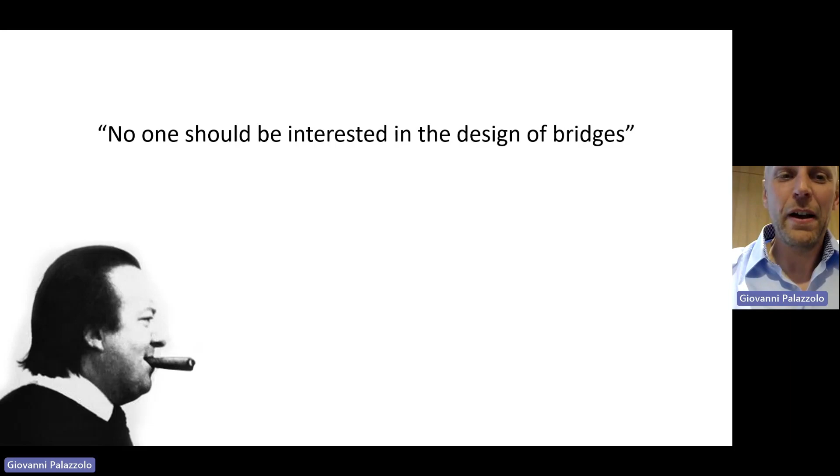It's a great quote and a valuable provocation for any designer. The quotation's from this gentleman in the bottom left-hand corner called Cedric Price. I'll come to him in a moment. In a way, it's just unfortunate that bridge design is used as the basis for this metaphor, because I find that bridge designers, whether from an engineering or an architectural background, I couldn't care less, to be problem solvers first and foremost.

In other words, we're all very concerned indeed how to get to the other side.

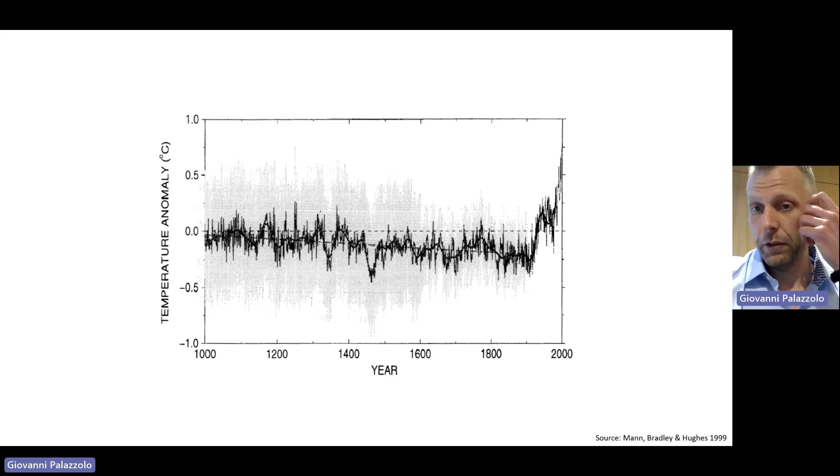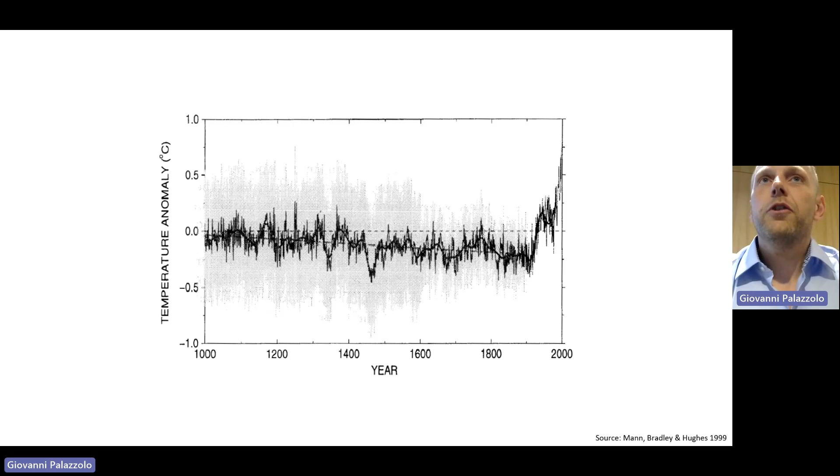Brief segue, this is the hockey stick. I was in my RIBA Part 1, my undergraduate, when this graph was produced, and it needs no introduction. Global temperature variation or anomaly on the vertical axis, plus or minus 1 degree for the last millennia. Now, of course, the implications of what this describes are so much more profound than a change in temperature. I'd say this is the defining image of our generation professionally, and the context within which all of us as designers are now operating.

Back to Cedric Price. He's been called the most important architect that you've never heard of. He was a teacher and a provocateur, raconteur, bon viveur, all of those things. He taught at the Architectural Association here in London, and through his largely unbuilt work, he was nevertheless a colossal influence on the course of late 20th century architecture, especially the work of the high-tech knights. Think of Foster, Rogers, and so on. Think of the Pompidou by Rogers in Paris.

Named for the client sponsor, Lord Snowdon, it was designed by Price with Frank Newby, an extraordinary designer himself, well known to this audience, I'm sure, and certainly to this institution.

The aviary employs principles of tensegrity, much like Newby's earlier Skylon at the Festival of Britain, but in this case, to provide a suspended framework of 4 tetrahedrons that then create this kind of enclosure wrapped in mesh.

I find the economy of this structure to be beautiful. There's a reductive approach to material here, and it's a direct response to a functional brief. In that sense, it is not dissimilar to bridge design, and I expect Price knew it.

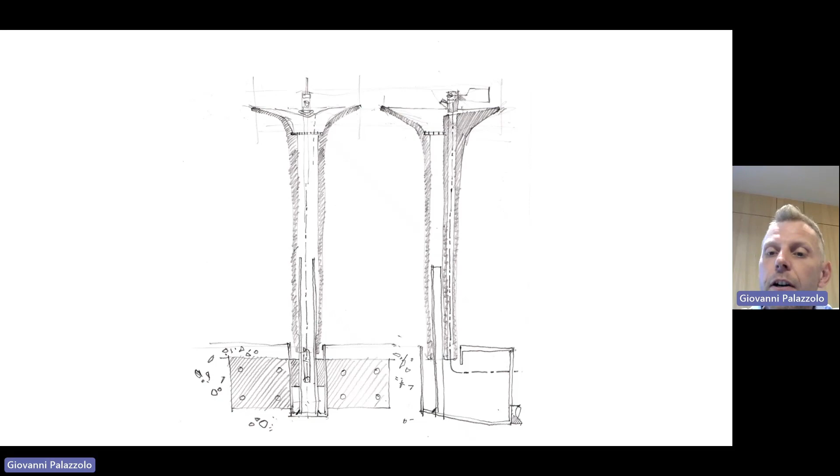They've since been installed in several of London's royal parks. It was won in an open international competition, and it's the first of two examples of industrial design that I'll share tonight, and it neatly encapsulates economy of purpose. It does the thing it's supposed to do, which is deliver clean, safe drinking water to all manner of users.

K9 at the far end there. There's a dog bowl at the base, which acts as an overflow, and it's also the trap. So if someone drops their wedding ring in the top, it will appear at the bottom for safe retrieval. It also functions as a bollard.

Now, these drawings are from the early competition iteration. The form and the connection at the base developed and was significantly refined, in fact, not least with Paul's input after we won the competition. And here you can see more of the refinement going on.

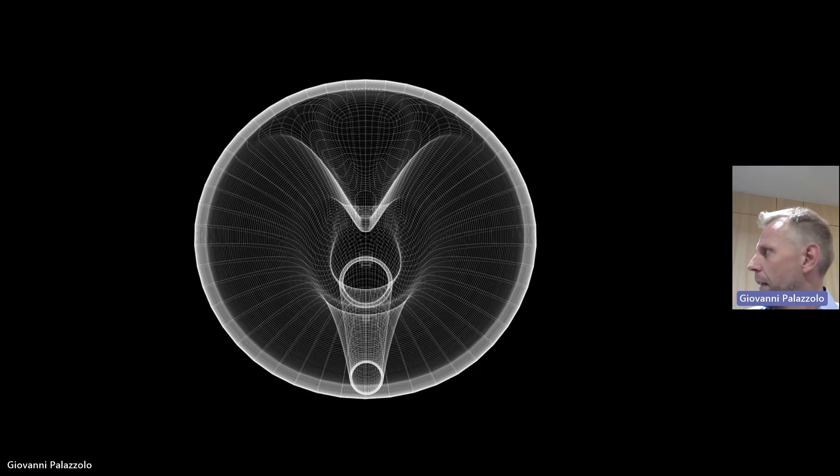As you can see, it's a singular form that provides the mounting for the faucet at the top of the screen, a bowl for splashes, the drain, a sleeved connection to the base assembly. The design is what I'd call tap agnostic. You can mount pretty much any outdoor tap on the market to the fountain.

Now, this is important to us and our approach to design. It's essentially open source, if you like. It's designed for long-term flexibility. And incidentally, that's another lesson that we've taken from the philosophy of Cedric Price.

Now, of course, we also have a fascination with material quality and aesthetics. We wouldn't be architects if we didn't. The drain cover is a kind of a kidney bean or a meniscus of stainless steel. And this is because visible cleanliness is important to any design where consumption is involved.

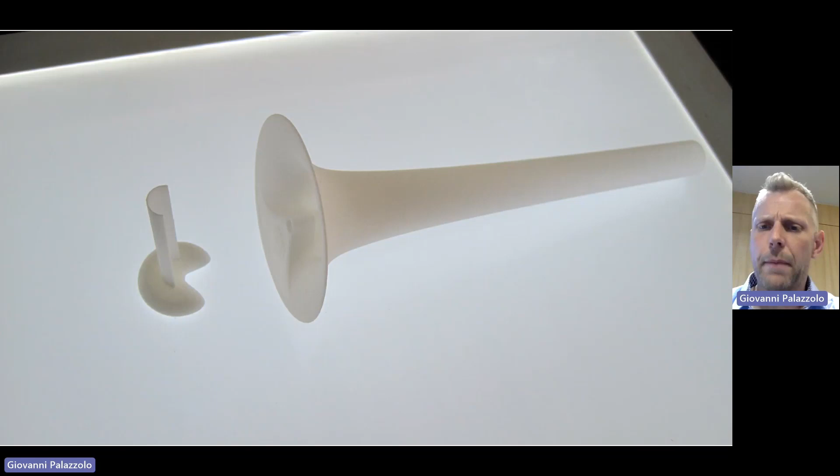This was also one of our first forays into rapid prototyping. It's now obviously commonplace in everything that we do. In this case, this little model was proof of concept that the various bits of this assembly fitted together. And here's the actual size, finalized geometry, which was milled on a 5-axis router, which was very unusual at the time. It's now, like I say, commonplace.

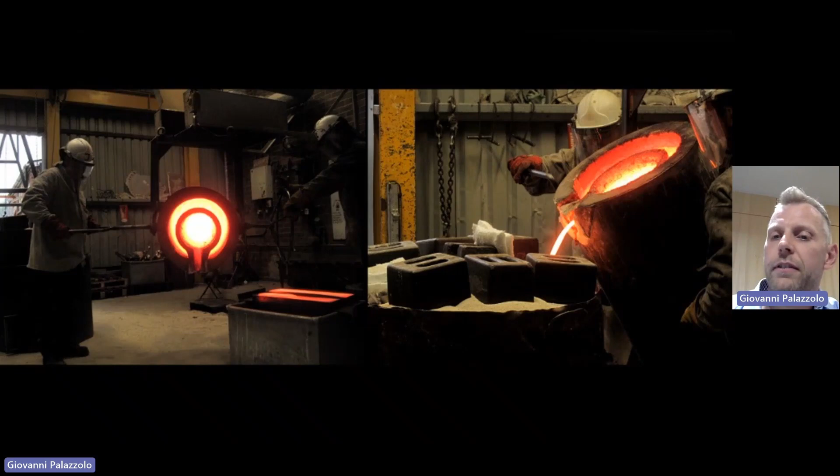Now, that formed the master part for the creation of wax-lost sand moulds at Castle Fine Arts Foundry in North Wales, which resulted in just the most gorgeous work when it came out of the casting. Obviously, it was then all polished up for installation in the parks.

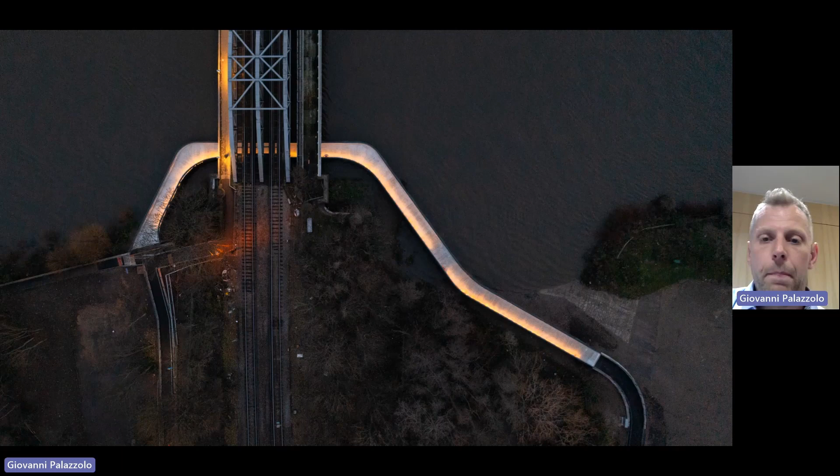It's the plan form. Now, economy of purpose is also achieved through the subtle flexing of the geometry at the corners of the structure. It's a really lovely worm's eye axonometric, or fish eye, if you like.

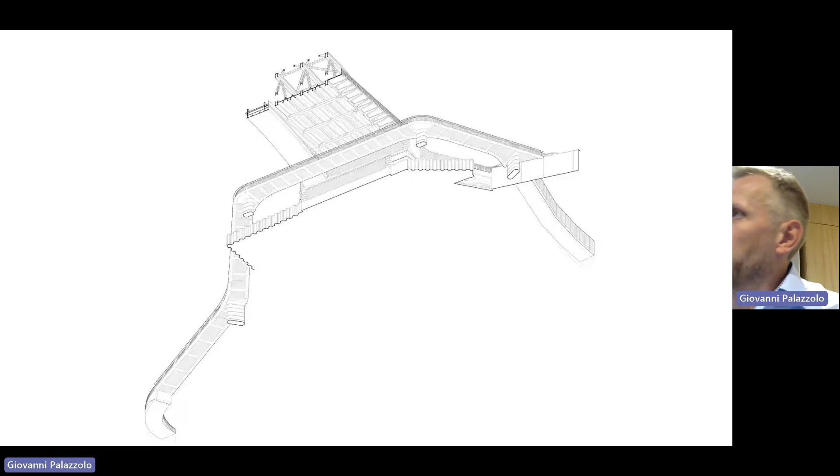Just where we go beneath the existing bridge, you can see how it's very subtle. The geometry of the deck widens at those points, a local increase in width. This is simply to enable the congregation of people at those two points, looking up and down the river, giving a wonderful new view of the city, but also more particularly a great spectator viewpoint for the Oxford and Cambridge boat race each year. That's not the race, these are just recreational rowers, as you can see.

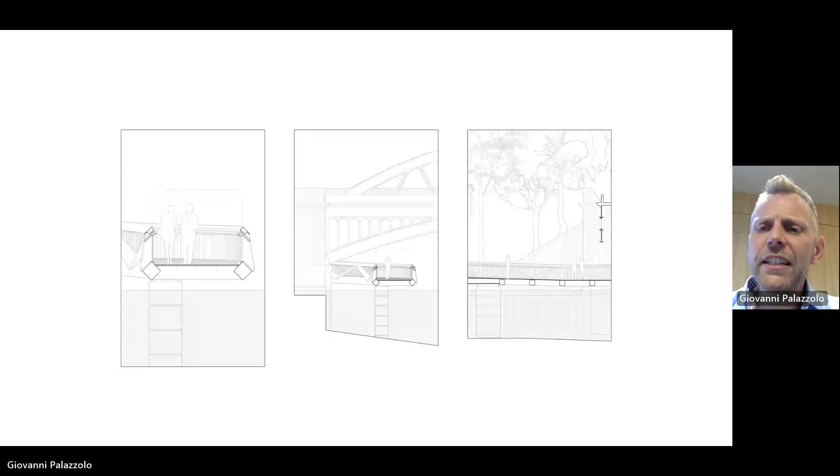Now, I mentioned the coincidence of structure and parapet. This is something we've explored on several recent bridges, and you'll see some of them this evening. But here it means the individual spans are discrete. They're connected at the piers, of course, but they're fabricated and installed simply as independent components, each one brought up the Thames from Tilbury docks before being floated across the piers and lowered on the receding tide. In other words, let nature do the work.

Now, of course, it's not quite as simple as that. The installation relied on gravity, but also the Chris Murphy 3-part locator pin. I don't think Chris is in the audience this evening, which is a shame, but his pin is somewhere in this photograph. Bridge design is full of these innovations, and they always come from economy - they're always about achieving efficiency, making more with less. In this case, free lifting and lowering capacity of the tide has been enabled by Chris's ingenious design that ensured absolutely pinpoint accuracy as this thing was dropped onto its piers as the water went out. Not a lot of people know that, and certainly none of the users each day, but it would have been quite a different bridge without it.

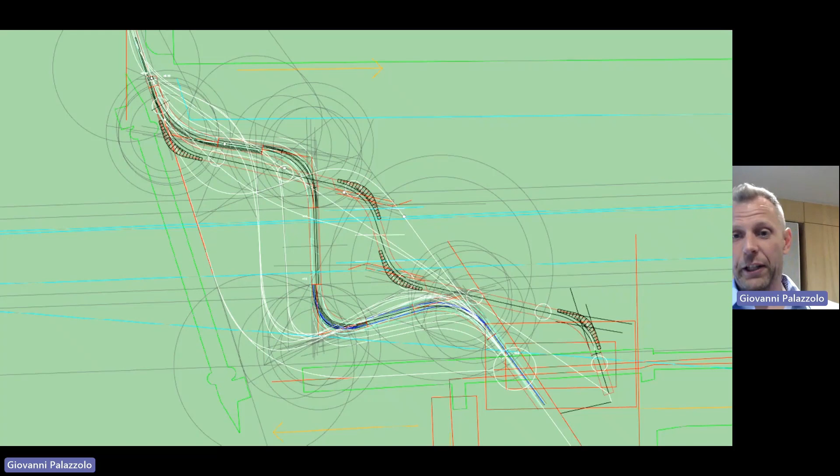Now, our next bridge does legitimately go from one side of something to another. In this case, Royal Victoria Dock in East London. As an aside, another joy in what we do comes through the way we use drawings to explore geometry - how geometry can solve a problem. This is very particular to bridges, much more so than buildings or industrial design. I think bridges are almost unique in this special aspect. This is a drawing where we're looking at the plan alignment of this particular structure alongside Simon Fryer and his team at Buro Happold. It's about probing the geometry in pursuit of solving the problem.

So a bit more on that now. You can see the ExCeL Centre at the top, Royal Victoria Dock in the middle, and the new Silvertown redevelopment by Lend-Lease at the bottom of the image. You'll also recognise the existing bridge at high level, just left of centre there, the delicious Davidson Royal Victoria Dock Bridge. Now the black line connects our A to B, but at a lower level than the existing, because this new bridge must cater for a vastly increased footfall once Silvertown is developed and in use.

The dotted line in the middle represents an opening section of the bridge where we must provide unlimited vertical clearance for tall ships and so on. The constraint on the left-hand side of the dock is provided by the existing bridge, not ours.

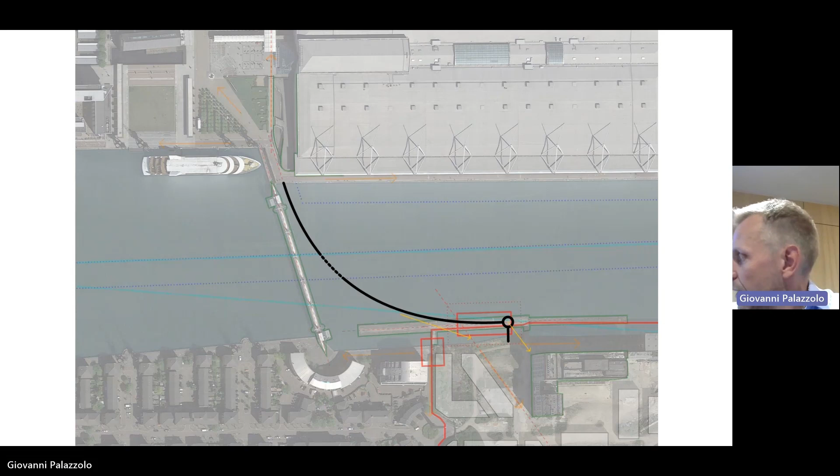Now, a straight line is obviously the shortest line, but in this case, we might make use of an existing structure, this kind of pontoon thing at the bottom, to shorten our bridge. We could flex the alignment to orient people directly into the heart of the development at the bottom. But notice that the dotted part of this diagram, which is the opening section, is starting to get very long. Very long and moving equals expensive and more energy intensive. So more normal to the channel shortens the opening parts, but here it lengthens the overall structure.

Likewise, again shorter opening span, but overall still much longer. Maybe we can make use of the dock again, although it's a longer route overall and less intuitive for users. Now we're starting to get somewhere - shortest opening span, and it delivers users where they want to get to. And there's the sweet spot: comparatively short opening span, comparatively direct route, plenty of modularity and replication in the curves and spans.

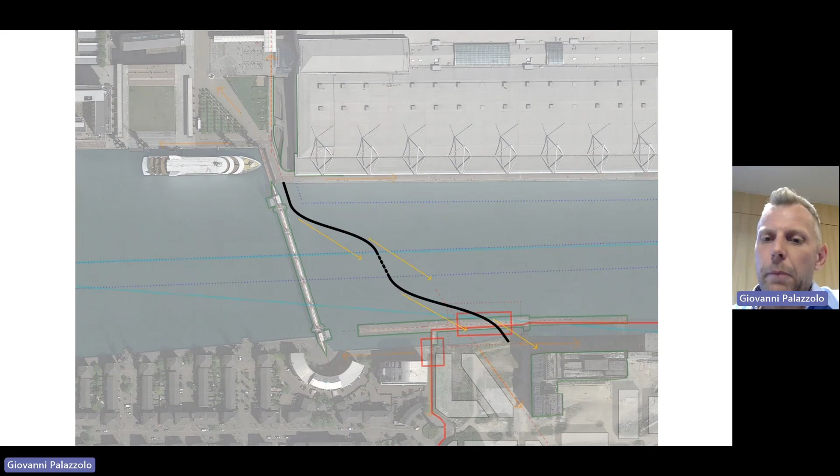And here it is. Newham Council granted planning permission on Tuesday night this week for this structure - a unanimous decision by committee, and we're straight into detailed design. Apparently the bridge needs to be open in 2025.

The opening span was designed with Eadon Consulting, of course. Who else?

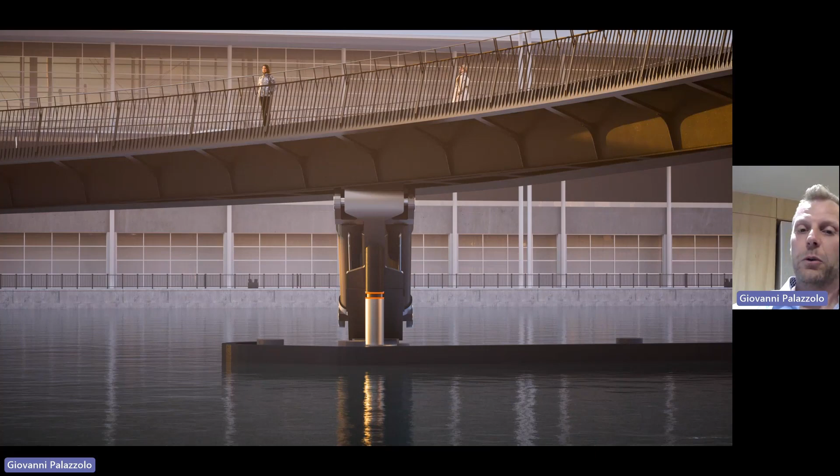The top surface is uninterrupted when closed. It's a stealth opening bridge in that sense. It's about a consistent urban experience for users, with the element of surprise and delight when boats do indeed need to pass through the dock. There's joy in the detail, embracing the difference between the static spans and the moving span. The actuators for the bascule are integrated into this pier design. The bridge is part machine, and the design does not try to hide this at all.

So there's another view. We can see the S-curving trajectory of the deck across the dock, backspan with this V pier in the foreground. Now there is a vertical curve in addition to the opening span, such that smaller crafts can just pass beneath. This means that the deck edge and the soffit is therefore visible from the quayside. So the consistency of the structure, including that opening span, is very important to us.

It's relatively efficient, and you have this appealing snake-like form beneath what is an otherwise urbane and civilized public route. The top surface is a continuation of the public realm being designed for Silvertown as a whole. So economy of purpose comes from reconciling the competing demands of the opening span and the overall alignment of the bridge, but also the urbane topside with a structurally responsible but still expressive undercarriage beneath it all.

And just briefly on another opening bridge, this is another structure with COWI, this time at Port of Dublin, which is in the midst of a post-Brexit boom, with huge expansion underway as a result of the increase in direct transfer of goods from the EU to Ireland. Unfortunate, but positive for us in the sense that this new bridge will service that boom, permitting lorry traffic to cross the Liffey near the harbour mouth, whilst maintaining access for river traffic.

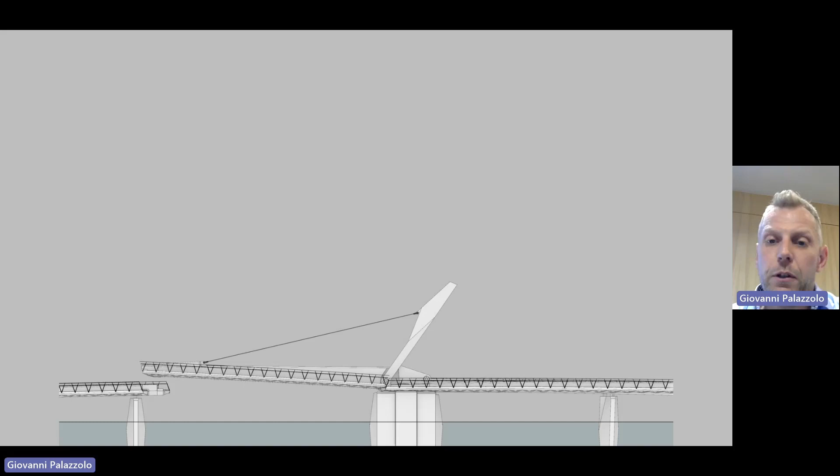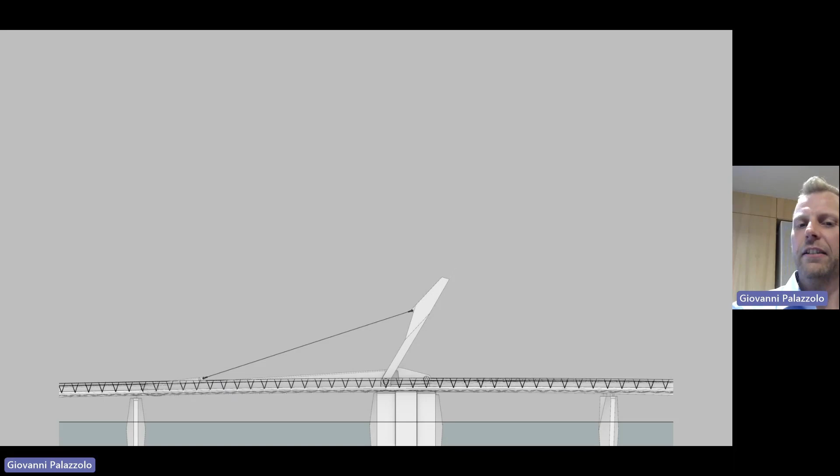This gives the game away. It's another piece of ingenious design, this time by Richard the Bridge. Speak of nominative determinism - who's in the audience, or is he? There he is. And also, of course, Eadon Consulting. By bringing the pivot of the counterweight forward of the deck pivot, the counterweight is brought into maximal effect earlier in the opening process, increasing its effectiveness and therefore the efficiency of the mechanism. The mechanism also occupies a smaller footprint as a result.

You can see the joy that comes from designing such a thing, making sure that the geometry all nests together and it all moves and looks sweet.

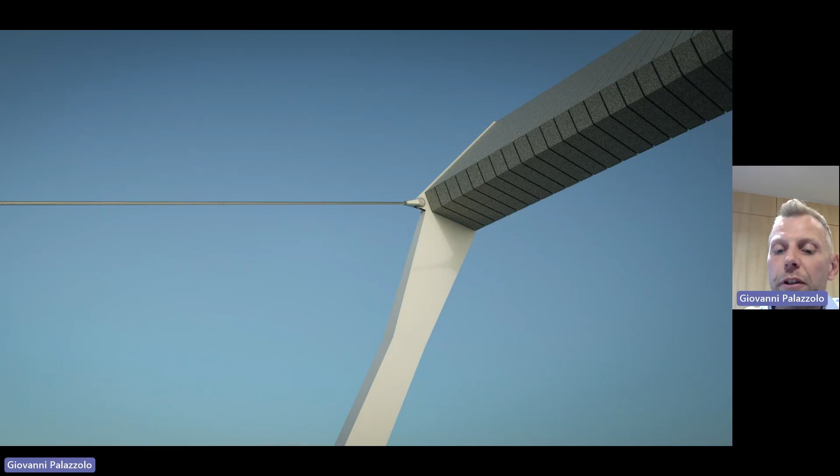Now, in the closed position, the counterweight - I feel like it's a demonstration of mass and the potential for movement, or potential energy, by holding this thing up in the air, a sort of portal over the roadway. We're currently exploring the use of Wicklow granite slabs as the counterweight material. This does bring some complications, but there is a clear reward there if it can be made to work. For one thing, it would hugely reduce the embodied carbon compared to concrete or metal.

Next category is economy of action. And like I said at the start, I have a hunch that this might be where there is the greatest potential for us as designers, and probably architects, to have the greatest impact in elevating the functional to the noteworthy or even extraordinary. First example here is actually a very ordinary structure, the Hams Way foot and cycle bridge near Worcester.

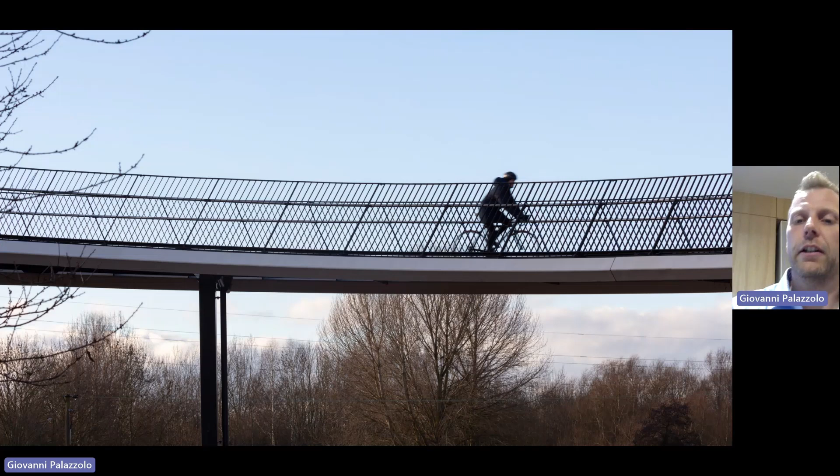So first, the parapets lean towards the direction of cycle traffic. This is part of National Cycle Route 46 from Worcester to the Malvern Hills. And this subtle shift, a very simple shift, alters your perception of the structure when you come onto it. It introduces some craft and a kind of graphic intrigue when you look along it, and also particularly when you look across it, as you can see in this image.

The approach spans couldn't be more simple. You can see on the left-hand side there, while on the right, the main span is an arched truss. To unify them, the outer edge beam and the members of the truss are all rotated approximately 45 degrees. This simple move captures the light, reducing the apparent weight of the structure, and again brings that craft sensibility that takes us away from its rather dull and quotidian peers.

And this detail, I absolutely love this detail. Where the approaches meet the main span, the two chords bend away from one another, separating the vertical support of the approaches and expressing the main span as a closed and separate element. So it's a modest and simple bridge, but I'd argue that these moves make it something a little bit special nevertheless.

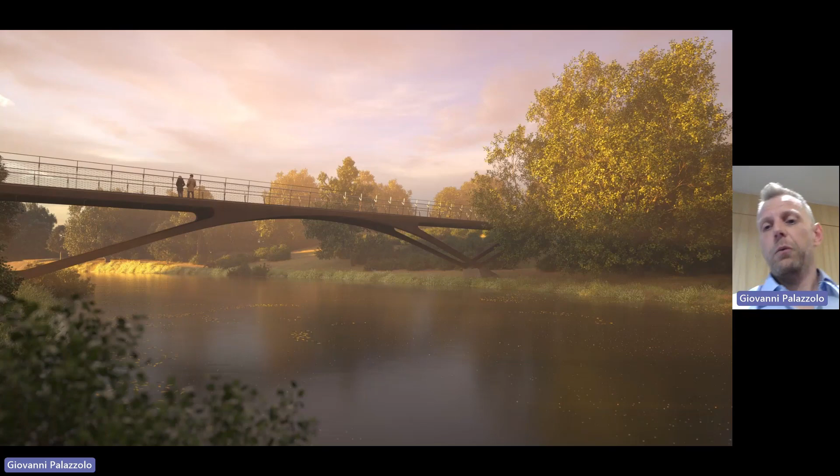And happily, the same team with Ben Curry and colleagues at COWI are now working on another bridge in Worcestershire, this time across the River Avon. And we have some hope that we might be able to talk to David about the fabrication of this structure in the future as well.

The entirely opposite end of the spectrum in terms of scale, I'd like to talk about 3 of our viaducts for HS2. We're part of the Eiffage Kier Ferrovial BAM team. We are sub-consultants to Arcadis Setec COWI. We are a very, very small cog in this gigantic machine.

But it's to great credit of our client, or clients, Arcadis Setec COWI, but also Eiffage Kier Ferrovial and BAM, that the role of a small practice such as ourselves is given a voice and can contribute to the discussion of what needs to be landscape appropriate design.

Now, I often think, Ian, of your formulation in your TED talk, that a badly designed and executed bridge is nothing short of an act of vandalism on the landscape. And I think that's brilliantly put, and I've had those words ringing in my head whenever I've thought about these structures.

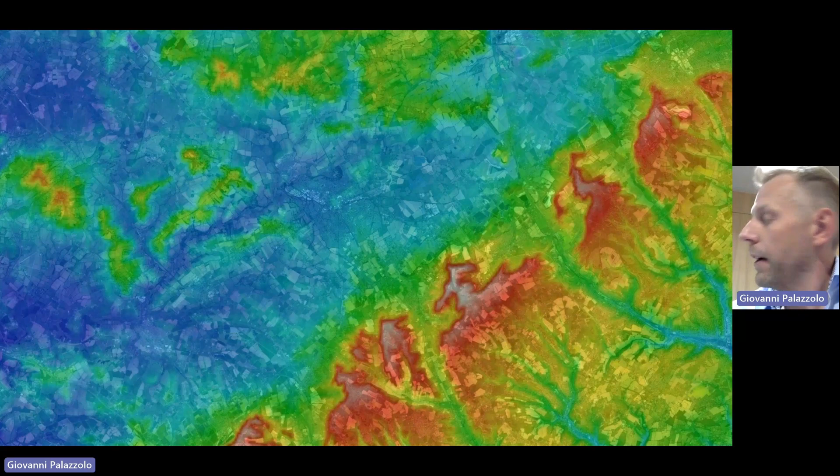Particularly the first 2 that I'm going to show you, which are located in the Chilterns area of outstanding natural beauty. This is a kind of elevation map of the Chiltern Escarpment, which you can see very clearly diagonally here on the right-hand side, with the great flat expanse of the Aylesbury Plain on the left. Importantly, you can see the valleys that cut through the Chiltern Escarpment. One of these is the Missenden Valley, which cuts through the escarpment at Wendover, just the centre bottom of the screen. This geographic feature is known appropriately as the Wendover Gap.

You can see a road, a railway running through this gap. It's been the main line of communication north-south through this part of the Chilterns for thousands of years. You've got road, railway, national grid, high voltage lines, public rights of way, everything follows this line through this landscape. So it's no accident that HS2 is also following this line.

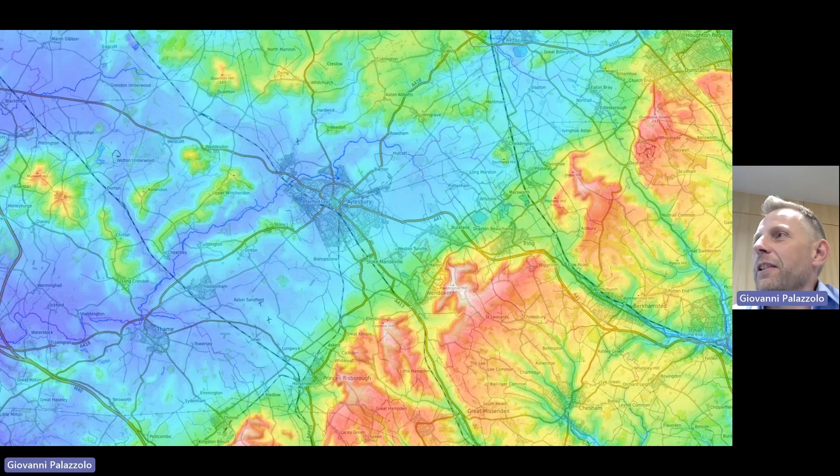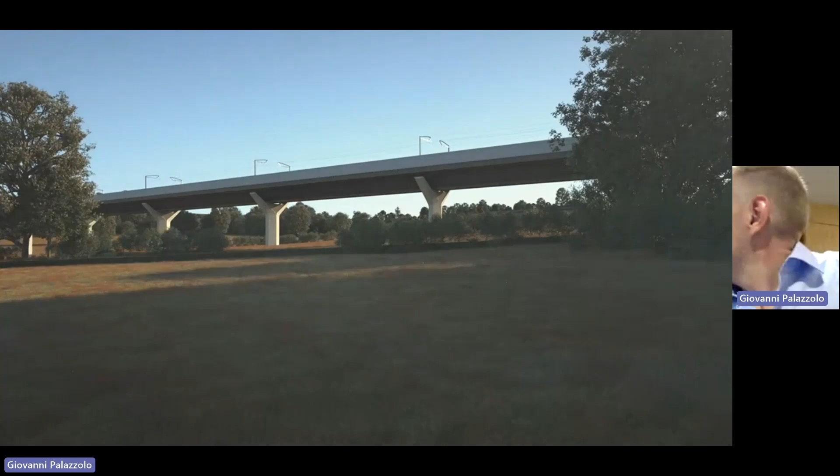That's certainly unusual. Again, in all of the views, apart from when you get very close to the structure, you can see that the viaduct is backgrounded by the landscape. Now, during the petitioning stage, the Campaign for the Protection of Rural England stated that, separate to the acknowledged icon of Colne Valley, the detailed design of Wendover would be a litmus test for the quality of design of HS2 Phase 1 in general. So no pressure.

So bearing that in mind, and of course Ian's TED talk, the first thing to do is pull the overall form of this viaduct into shape, respond to the landscape. This is the reference design. Now it works, and it had its uses in terms of the progress of the bill through Parliament, but what a lopsided appearance.

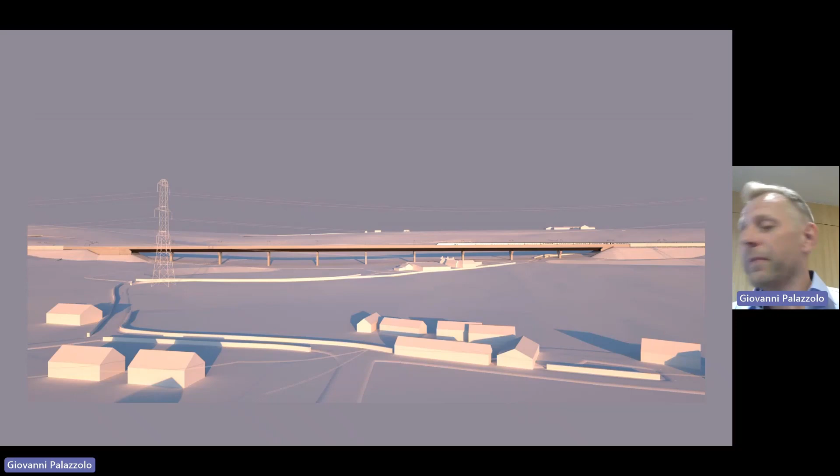Bring some symmetry, ensure that the space below the deck is balanced, and the air draft beneath the structure is greater than the beam depth. Simple things.

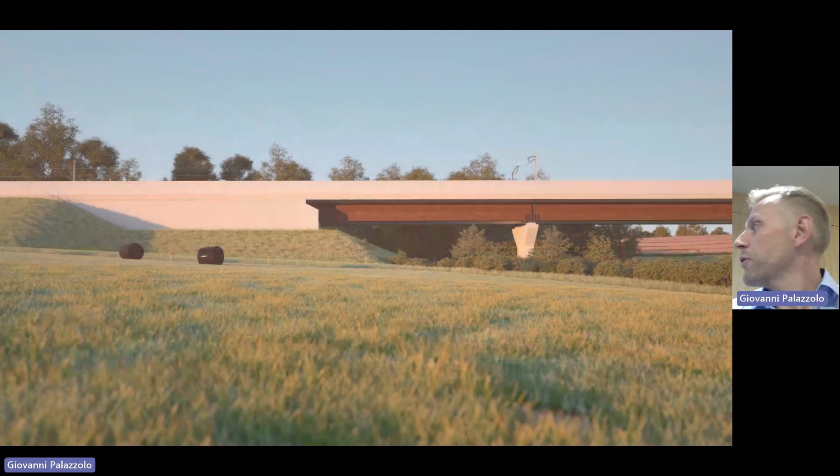Shortening the structure at one end reduces the cost, obviously. And even better, if we can replace that wall with embankment, we can reduce the embodied carbon even further.

We also look to eliminate all of the clutter at the abutments. So we bury the ends of the structure into the earthwork, so the viaduct springs from sockets in the landscape rather than frontal walls imposed upon it. The access stairways are then all corralled into one place with a single central access up the apron. And then within the bearing chamber, that's where we also have our access up onto the trace and for evacuation from the viaduct.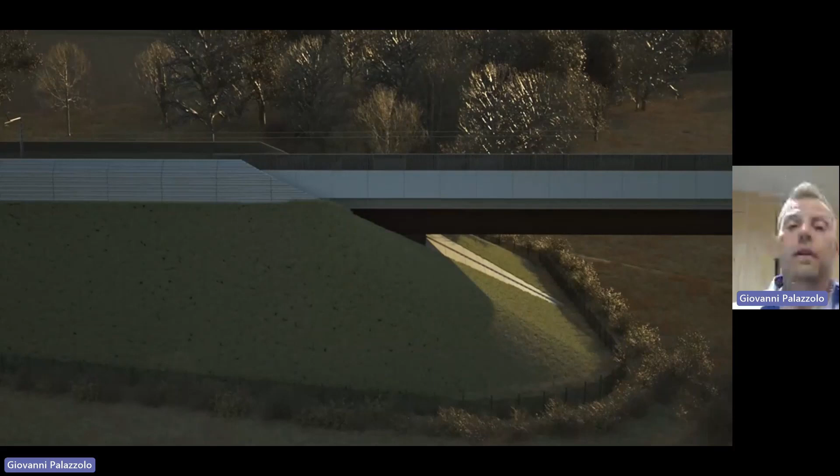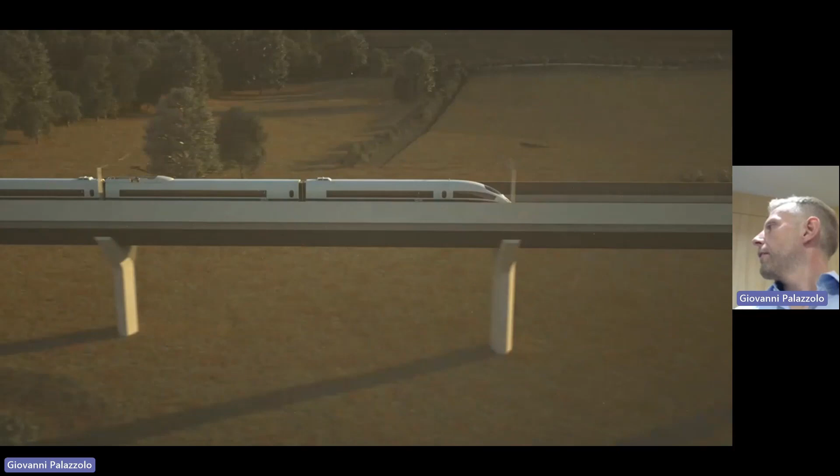You can see here that the noise barriers and the parapet all sleeve into one another. It gives you this balanced silhouette, which suits the near symmetrical ground profile from north to south. There's those piers again. The field pattern is reinstated beneath the structure, so it flows uninterrupted. And then we integrate balancing ponds and all the kind of other paraphernalia around the structure. And then again, at the south abutment, we have that same kind of socket detail. So it's kept as simple as possible.

So about those piers - see Gerard's in the audience. These two slides, I don't know if you recall a discussion on this. Here's an early iteration of the design, and you can see that at this point we're actually quite proud of our piers. You can't really see it in this image, but the hammerheads flow very nicely down into the narrow stem. We have the weathering steel, which again, this image doesn't show, but that sits very nicely against the rural landscape. Typically, you're seeing this against fields and trees and what have you. It all starts to blend, it all starts to work.

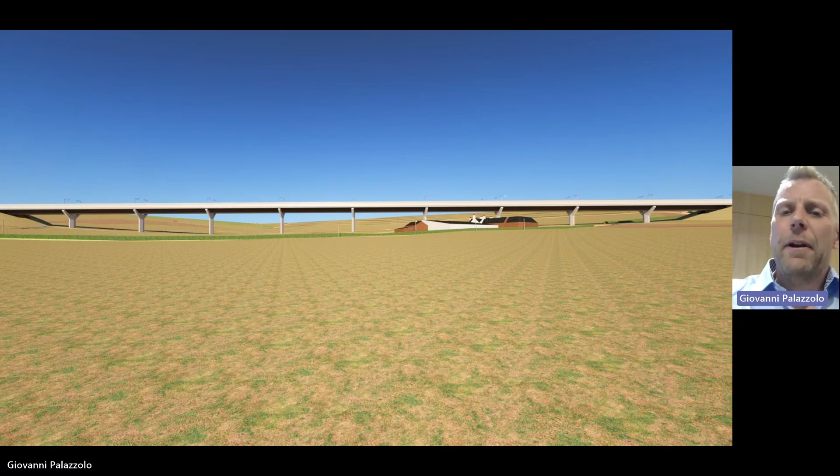But then we did this. Bearing in mind that this viaduct will overwhelmingly be seen in elevation, by projecting the pier heads upwards past the bearings, we achieve several things. We imply a connection visually between the pier and the parapet, which further recesses the beam, accentuating the lighter and more slender aspects of the design. It also masks the bearings.

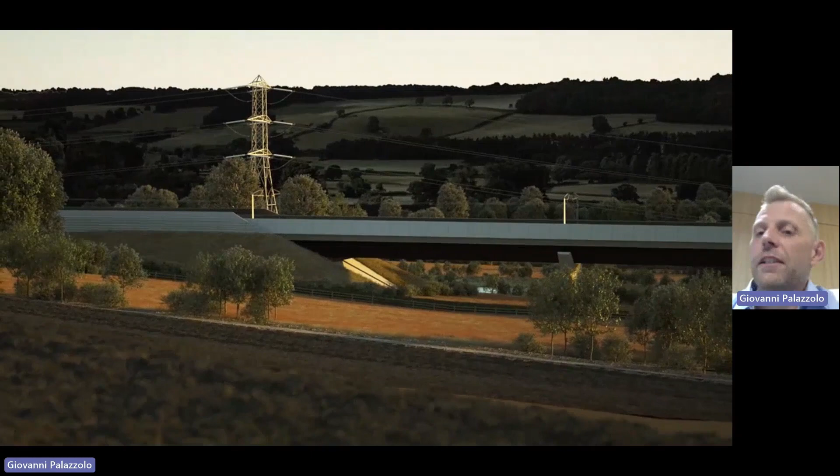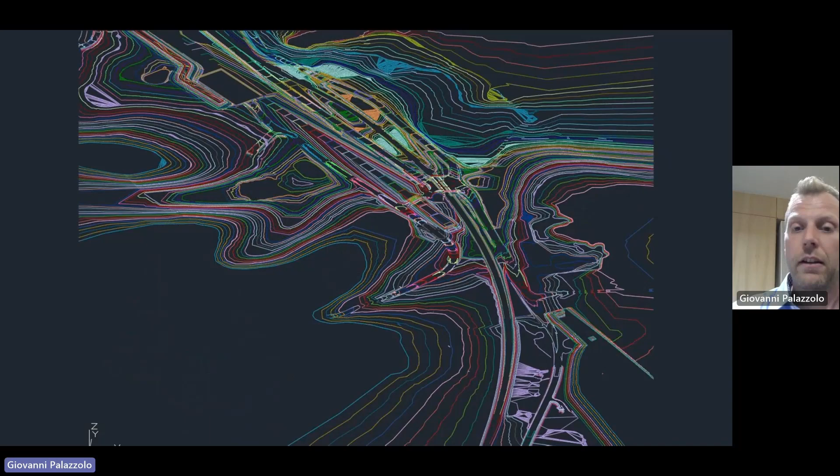Only 1.5 miles north of Wendover Dean, our next viaduct is located right in the middle of the Wendover Gap. It's the confluence of all those lines of communication - the A413, Network Rail, B roads, everything all crammed into this little knot in the landscape. And now we add HS2 to this congested space. It's certainly an economic use of real estate. Now, in contrast to Wendover Dean, Small Dean Viaduct is one that the public will experience at very close quarters.

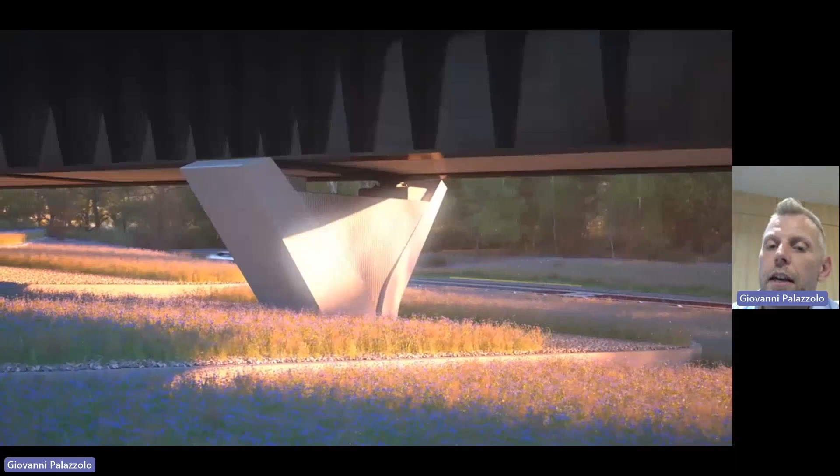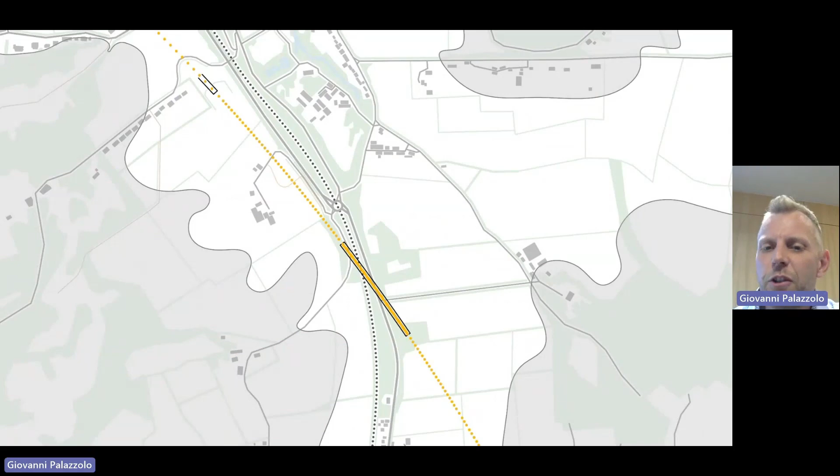You've got the A413, this main road, and public rights of way that pass directly beneath it. So detailing becomes even more important, but also the oblique view of the structure. So where the elevation was key at Wendover, leading to the symmetry and the sockets and the piers, here at Small Dean, the skew is everything. The views along the structure are absolutely key. You can see what I mean by that skew, and also just how the structure sits across this dip in the landform. It's essentially masked from the middle distance, and almost completely hidden from the long distance.

But close up, you see it all. And although it's the same structural form as Wendover Dean, it's a double composite structure, which Paul Van Hagen will be able to talk more about.

We're dealing with substantially longer spans than at Wendover and a different set of construction priorities on the part of EKFB. Now, these outriggers were originally suggested by Eiffage Métal as a way of accelerating construction by allowing for the inclusion of

permanent formwork for casting the deck on top. But of course, we seized upon them as a tremendous opportunity to do something with those oblique views. They immediately alter the appearance of the viaduct as you come along the road. And the design and coordination expresses the varying stiffening requirements.

Again, this is something that Paul will be able to talk to. These stiffeners bunch above the piers, they spread out to mid-span, they kind of concertina back again. And you will see that as you drive along the road, you'll see this kind of animation to the structure. I think this sort of infrastructural drama, if you like, will be extraordinary. I'm very much looking forward to seeing that structure on site in the coming years.

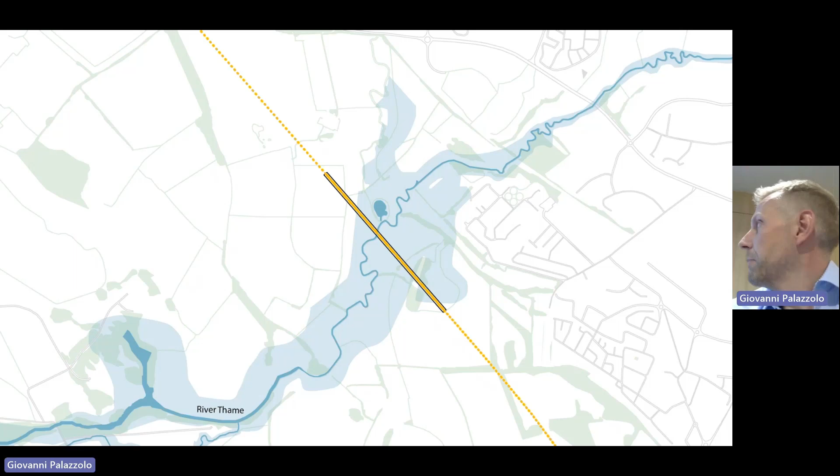Third viaduct is the next one to the north of the Chilterns AONB. It's not in the AONB, but it's nearby. This crosses the floodplain of the River Thame just to the west of Aylesbury. It's our longest and lowest viaduct on the route. Very different landform, flat as a pancake. Structure could be described as an elevated causeway.

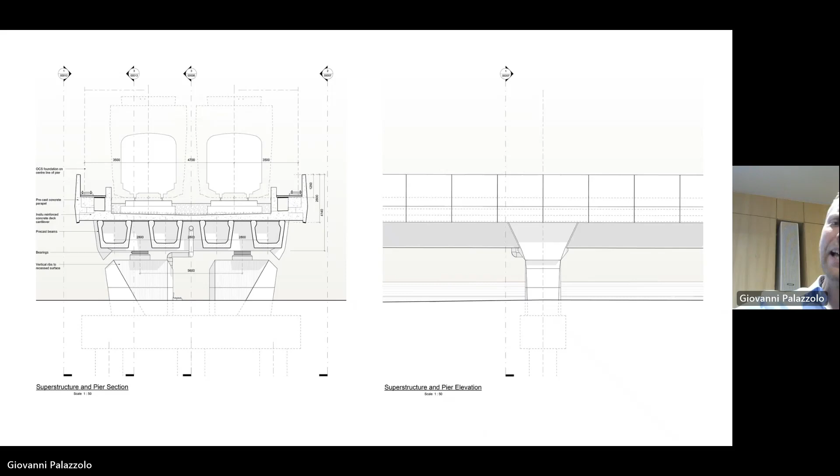It's that low. Now, there have been more iterations of this structure than any other we've been involved with on the project, and they principally concern the disposition of the beams. So it's not our bag at all. In each iteration, however, our focus has been on the detail, the deck connection, between the pier and the deck. So in a way, this is an extreme type of economy of action. We've been focusing all our energy on this one detail.

Now, the final scheme has been heavily influenced by EKFB's construction team more than anyone, and their subcontractor Pacadar. And Fernando's in the audience, so he'll be very much aware of all the detail of that. We've done something similar to Wendover Dean in that we've projected part of the pier head up. So it's again a very simple move, economy of action, like I say.

But this punctuates or interrupts the face of that beam to ensure that the viaduct is seen as a sequence of spans rather than just a relentless single extrusion. And again, in an anthropomorphic way, the detail clasps the deck. Now, this is a minimalist approach, but I think it's in details like this that a pretty straightforward viaduct can succeed or fail. And like I say, this represents the economy of action.

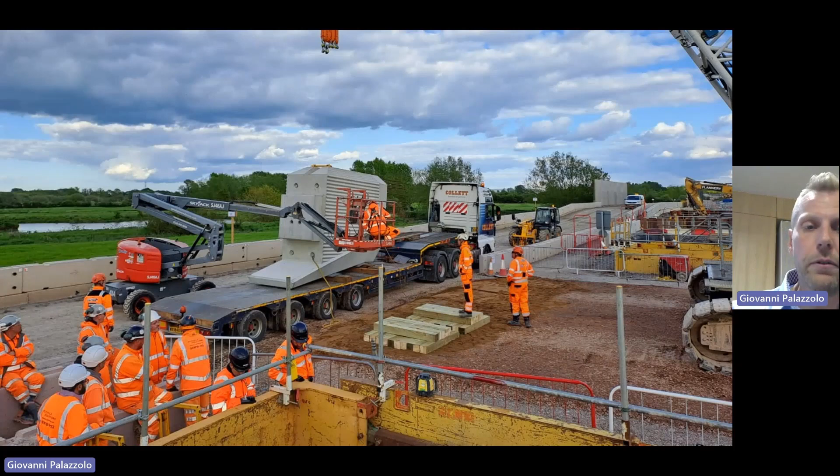What's remarkable about this structure actually is that it's one of the most recent consents that we have got. We only got consent for it halfway through last year, and yet it's the most progressed structure on the ground. It's really astonishing how lean this construction process is.

Oh, I'm going to do my bit for the Scottish Tourist Board now. So I'm going to talk about a couple of buildings as well. I don't know how much time I've got this evening. Yeah, keep going. Well, you can always stop me or get me to hurry up. But yeah, no, quite.

How do I start with this? So we have an office here in London, which most of you are aware of. We also have an office up in the Highlands of Scotland, which is where I originally grew up, and I've been working there for the last 10 years or so.

And it's the most incredible landscape. It's almost unbelievable that this landscape is in the British Isles, in fact. The Cairngorms National Park is the highest, most remote bit of landscape that we have in Britain. It's a fragment of the subarctic transplanted to Scotland. It combines elements of the truly sublime, and I mean that in the Victorian, terrifying sense, with kind of absurdly picturesque, verging on the chocolate box. It's an absolutely amazing place. It's where I'm very fortunate to live and spend most of my professional time these days.

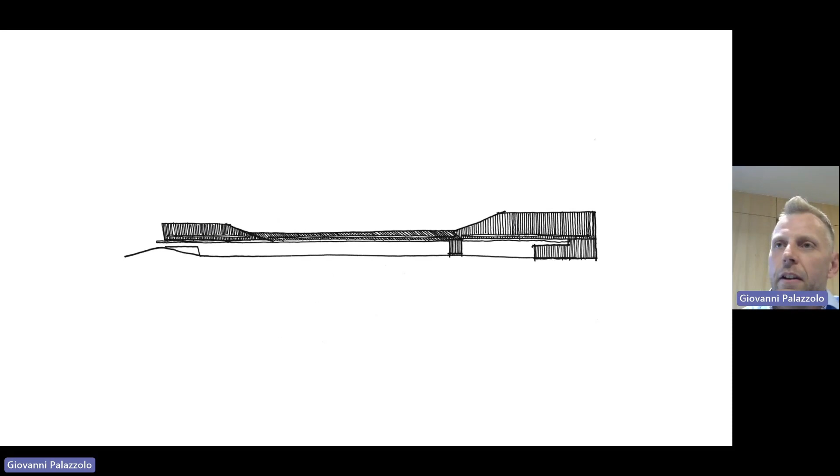I think we're probably quite an unusual architecture practice because of that. The clarity and economy that I keep talking about is applied to buildings in a way that it wouldn't be if we weren't involved in bridges. I think I can say that with a great deal of confidence.

This is the site of our studio in Scotland. This is a new building which we designed a few years ago and completed, I think it was 2020 or thereabouts, and moved into it.

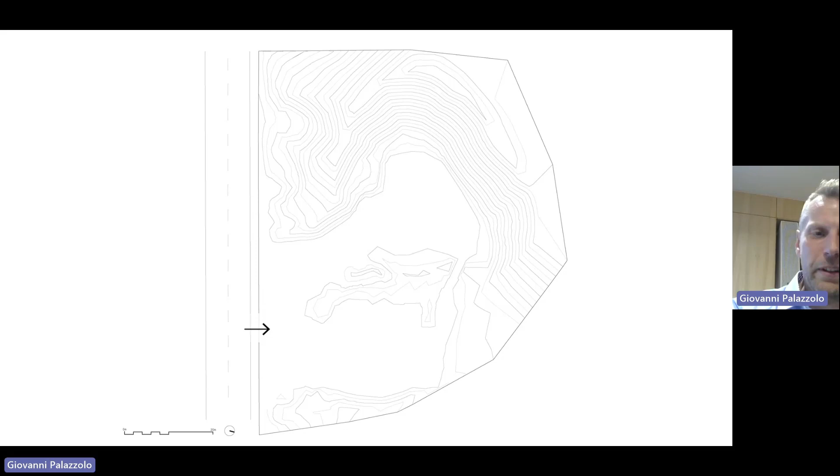It's a disused quarry that's been used latterly as a tip. You can see the roadway on the left-hand side there. What's great about it, it has level access. Previously, we were shoehorned into a little building behind my house up a hill. In winter, it's an absolute nightmare having to clear the path up to it. But now we have this beautiful facility that we call home.

Again, like with Wendover and Small Dean and Thame, our building is a direct response to the landform. We've taken the bowl shape of the quarry and essentially wrapped our building, pushed it into it. There are various elements, in this case concrete chimneys, which provide the hearth, if you like. Staying warm in winter is very important up there. These become the piers, if you like, that the building is then located around.

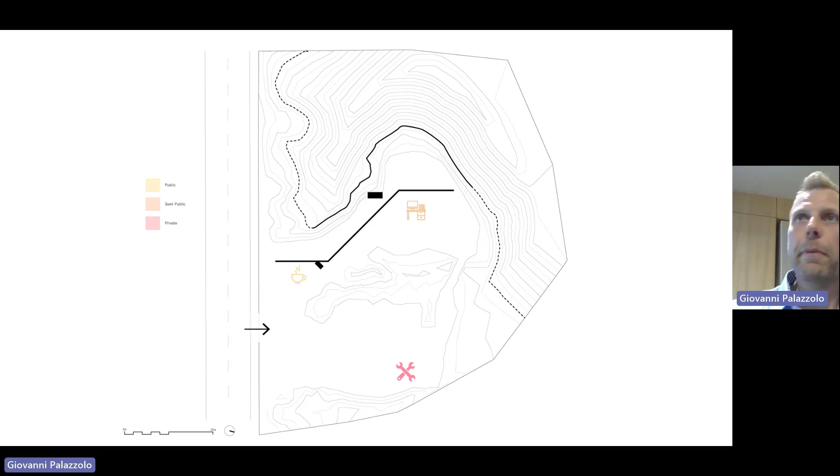Our studio, the big part, has its backside pushed into the bowl of the quarry. Meanwhile, we have a cafe which sits on the roadside, and that's the public face of the practice. You can see how these volumes are built up around that initial response to the landform. Then there's a covered walkway between those two buildings, the cafe and the studio.

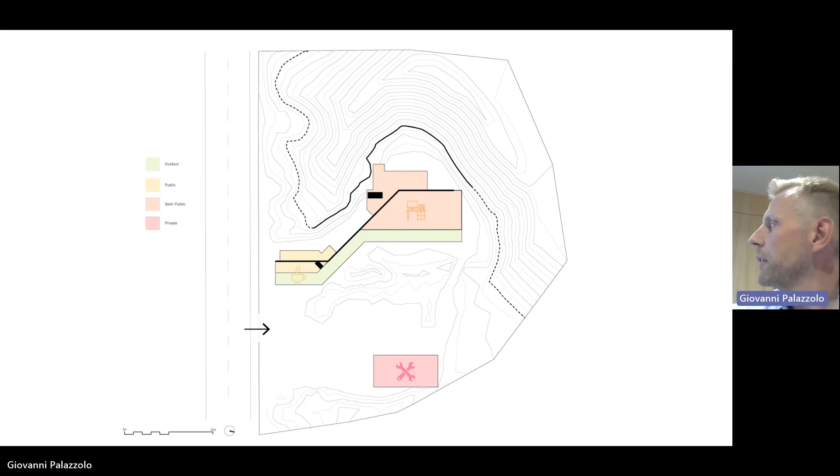Although this was used as a tip, the landscape around it is all a triple SSSI. It's a site of—it's an SAC. Also, in Scotland we don't have AONBs, we have national scenic areas—it's one of those. It's got every designation going apart from our site. We were very lucky in the sense that there was this sort of hole that we could occupy.

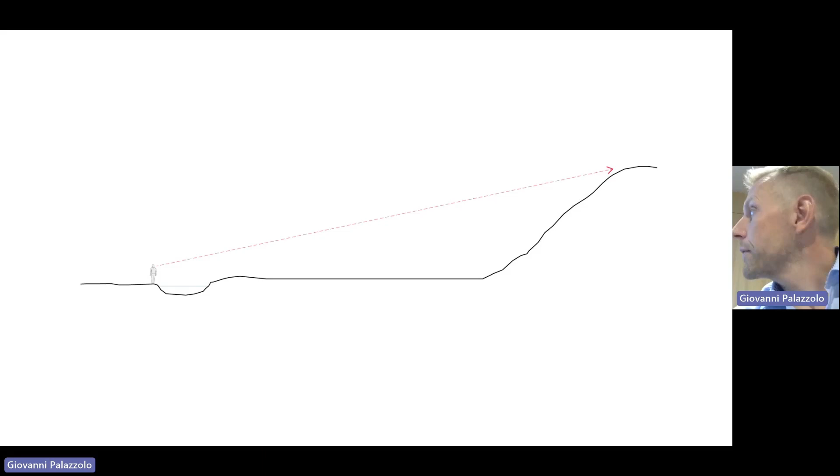Then in cross section, again in terms of response to landscape, you can see that if you stand in the center of the site there's quite a big drop between the escarpment edge of the quarry and the middle of the site, and that's where we sit our building. So to conceal the scale of the building, the roof is set at the same angle, more or less, as your eye line from the middle of the site to the top of the quarry edge, which means you don't ever perceive how big that building is until you walk into it.

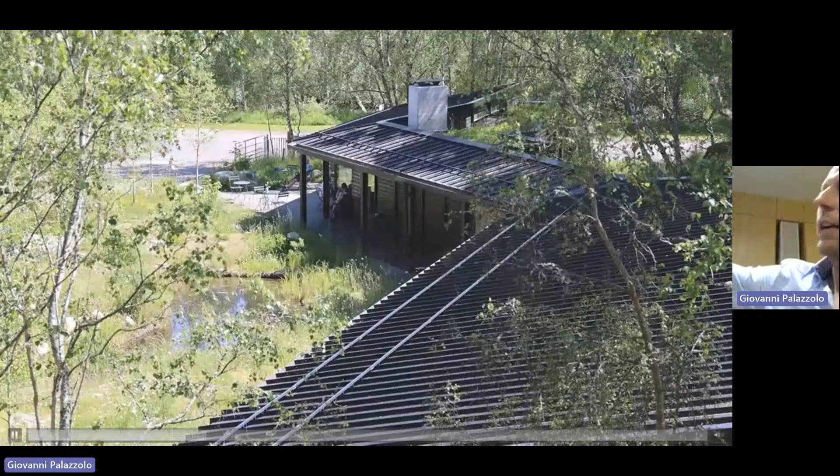Another little video—so as far as the public are concerned, it's that bit at the end of the shot there that they see and experience. It's only when people walk into the building that they actually realise just how large it is. Ian's been to the building and can probably vouch for me on that. But it also means we can have our own private space, a roof terrace here to the rear of the building, and it's just a very lovely place to work.

And like I say, I think if we weren't bridge designers, it would have looked very different.

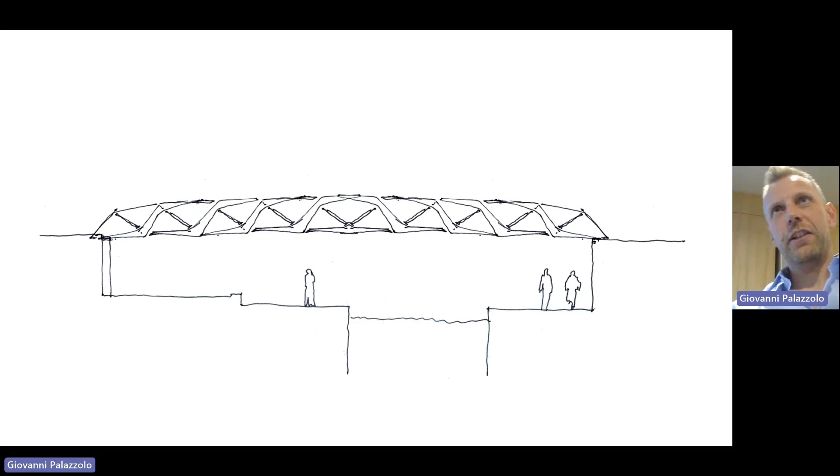Another way of looking at economy of action is embodied by another of our recent bridges. This is Esperance in King's Cross, which Ezra and Martin, sitting in the centre of the auditorium, were responsible for. This design takes the philosophy of honing a singular part, or a single constituent part of the structure—in this case, the module of a single Warren truss—and then repeating it. So there's economy of action there. You're looking at one part, and really getting into the detail: the way the plates are folded, bent, exactly what the welds are doing, exactly where they're going.

The model which Martin and Ezra produced for this design was handed directly to SH Structures. I don't think they changed it at all—they fabricated it direct from the architect and engineer's model.

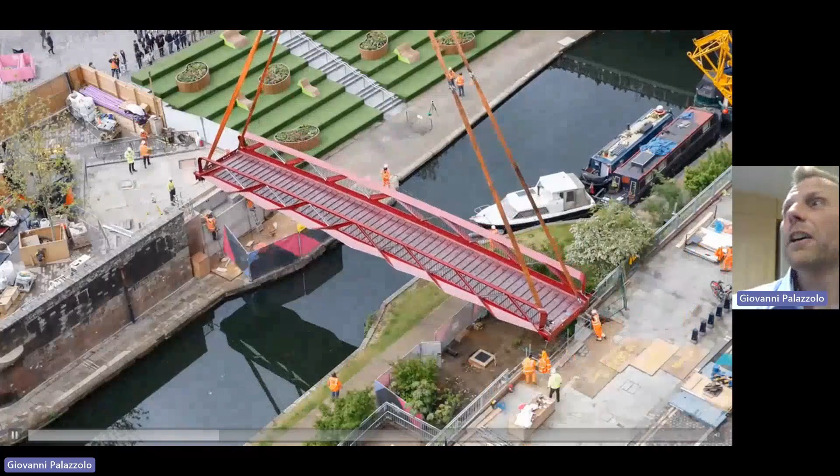Although we're only 30 or 40 meters away from Knight Architects' Bridge, the Granary Square Bridge, just to the east, our bridge, Esperance, is nevertheless a very well-trafficked structure. In fact, I don't think the footfall on either Knight's Bridge or our bridge has reduced since this one went in—if anything, it's made the area busier.

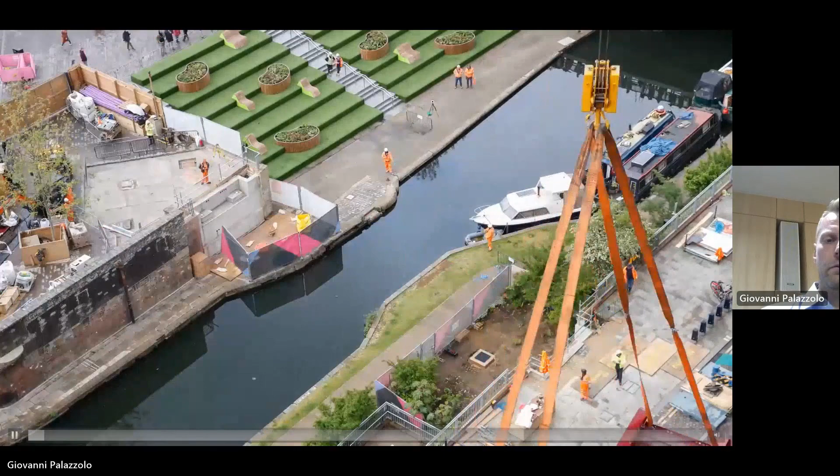The third and final category to consider is economy of material. This is probably the most obvious category for a bridge designer, and it's almost axiomatic—it's built into all of us as bridge designers, whether engineers or architects. It's a key part of our approach and upbringing.

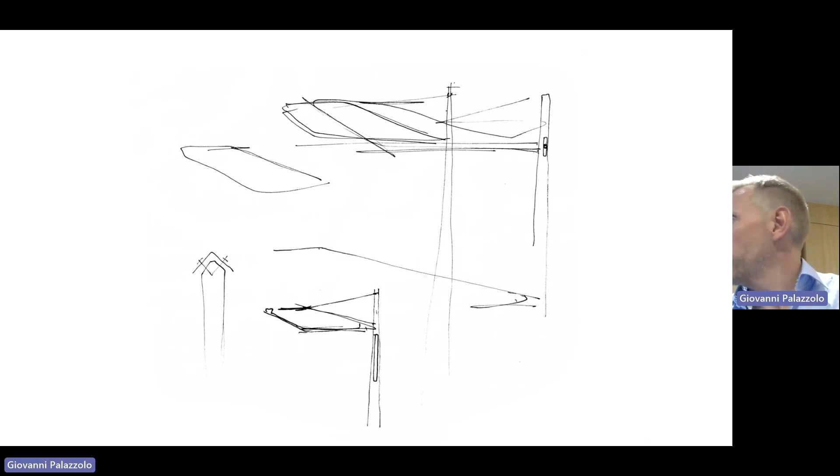But again, I'm going to refer to a bit of industrial design before looking at some bridges. This is an existing overhead line structure—I think this is the Series 2 OLE, but they're all much of a muchness. There was a competition a few years ago run by the IABSE to design an aesthetic OLE. We took this back to starting principles: what is this thing doing? It's holding a single wire, the contact wire for the train's pantograph that supplies power to the vehicle, and a second wire, the catenary, which keeps that wire in position vertically. Everything else is in support of those two things.

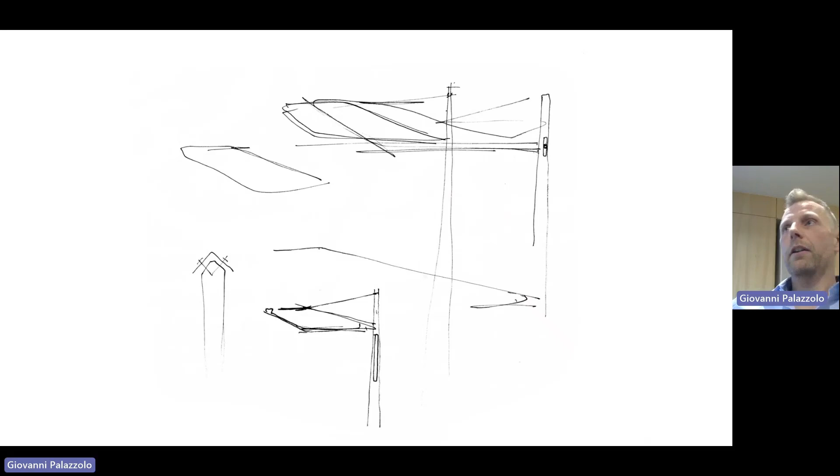So we thought, well, this is just a question of geometry—just a question of shape. It's about where this thing is in space, and you can define that from one mast to the next. In particular, if we can make the component that holds all this apparatus up in the air out of an insulating material, then we're killing two birds with one stone again.

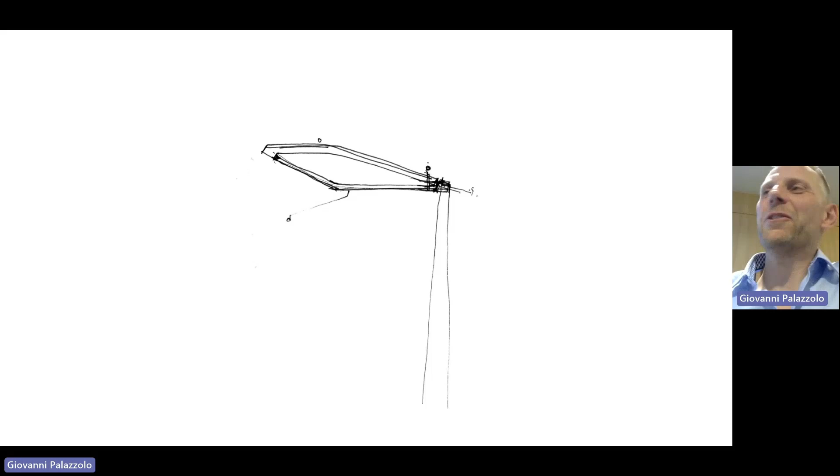We worked on this project with Brian Duguid at Mott MacDonald. Again, it's not a bridge, but we're using a bridge engineer as our collaborator. You can see here how the geometry of those wires sets the geometry of our mast. We were one of two or three winners, I think—Martin was on the jury, so he'll remember. It's been a terrific experience working on this.

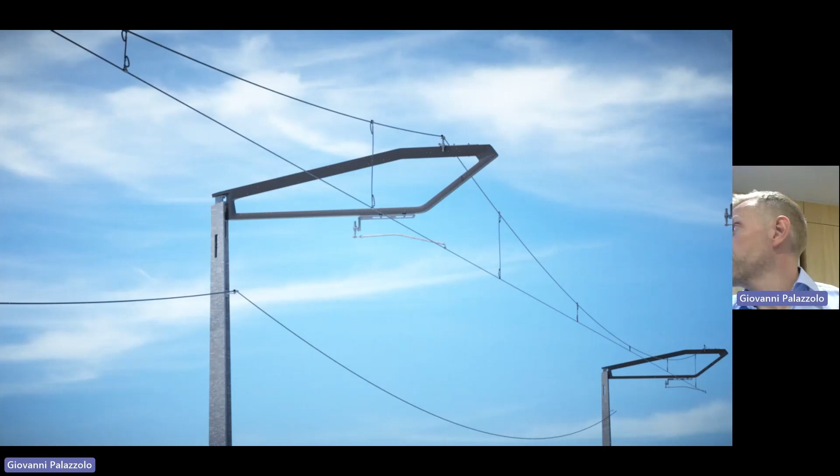There's our mast. Much like the fountain, which I described as tap agnostic, our mast is componentry agnostic—it will take all the SNCF fittings, and it will take all of the fittings typically used on Network Rail. They can all be mounted onto our boom.

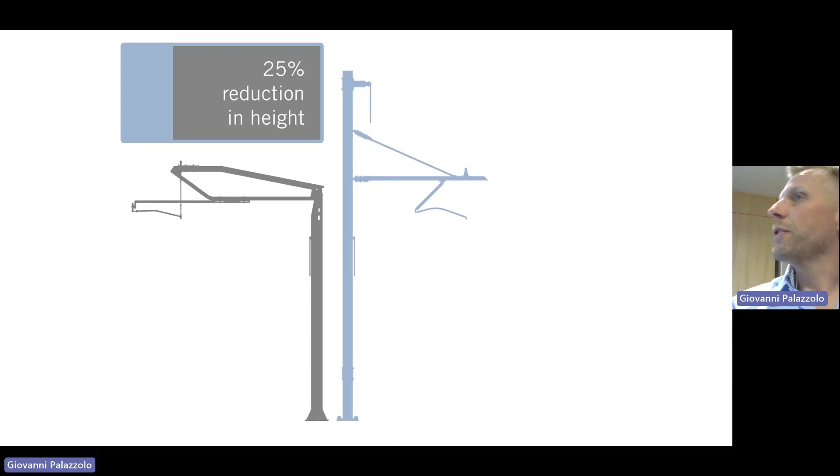There's the drawing, there's the final prototype. There's now several of these prototypes dotted around Britain in various testing yards. What it does, which is really important, is reduce the height of this overall assembly compared to existing systems, and it reduces the area both in section, or transverse, and in elevation.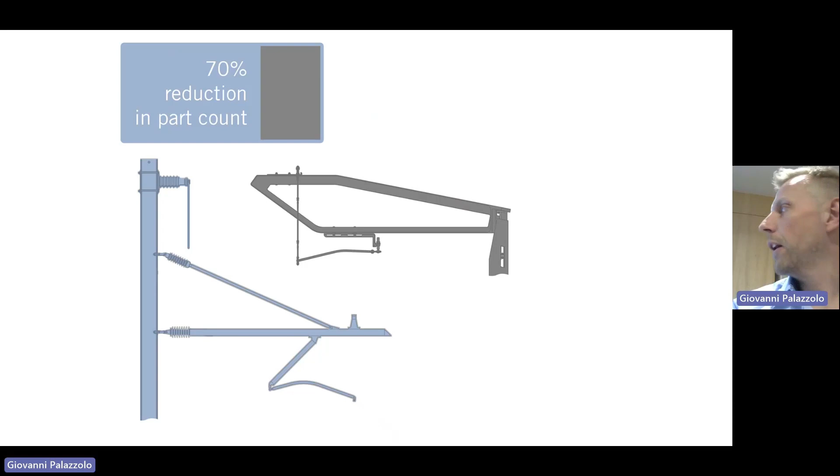And this is the key one, really: a 70% reduction in part count. This one single component eliminates all of those pots and various bits of tubing and so forth—the meccano that you normally see. And that results in a tremendous reduction in embodied CO2.

The secret weapon in the design is the material used to form this boom, called Permali, which is of the same generation as Bakelite. It's absolutely extraordinary—it used to be used for the same sort of applications carbon fibre is used for today. It's a lightweight composite, a beech laminate that's then pressure impregnated with resin, and it's still used for transformer housings in power stations. You can mill it out, and it's got such physical and electrical strength that it can contain the transformer, but it's also a fabulous structural material in its own right.

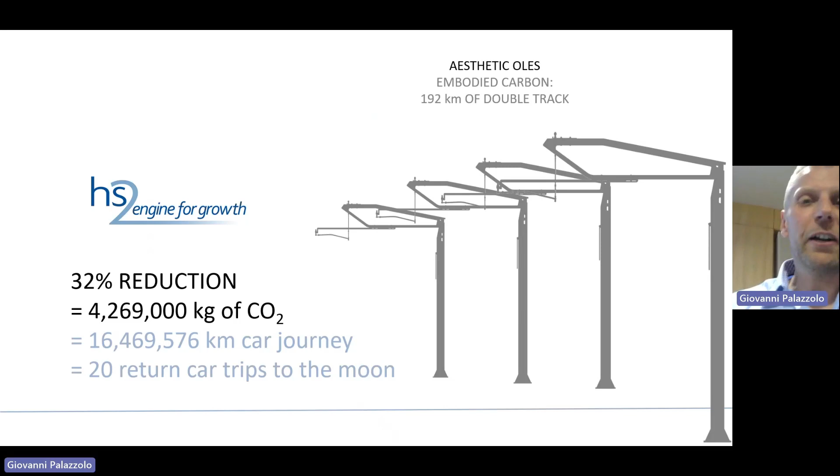You can see we've even got the old HS2 logo there. We've been pursuing this particular angle for some time. We think it's nevertheless a more appealing form, a more appealing design than the OLE you typically see, and certainly it's a more compact footprint and quicker to install.

Another bit for the Scottish Tourist Board, jumping around here—this is the northwest coast. This is Torridon, which, apart from the Cairngorms, is probably the second most special part of the British Isles. Here we are looking at Slioch.

This is a client meeting—two of our clients, Paul on the left, Will on the right, from the National Trust for Scotland.

We're designing the National Trust's new ranger base and visitor centre in Torridon. Much like our studio, this building would not be what it is, were it not for the fact that we are involved in bridge design.

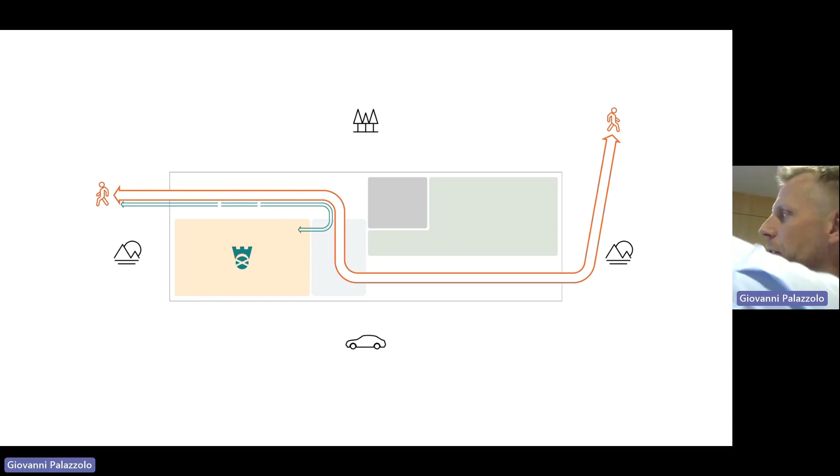I'm going to go quickly through the plan organisation. You can see we've got the ranger base on the left, public facilities on the right. There's quite a bit of complexity in terms of how public access is maintained and arranged, which I won't go into. I'll get to the headline, which is that this building is held off the ground. You can see this water channel just to the bottom of the plan there.

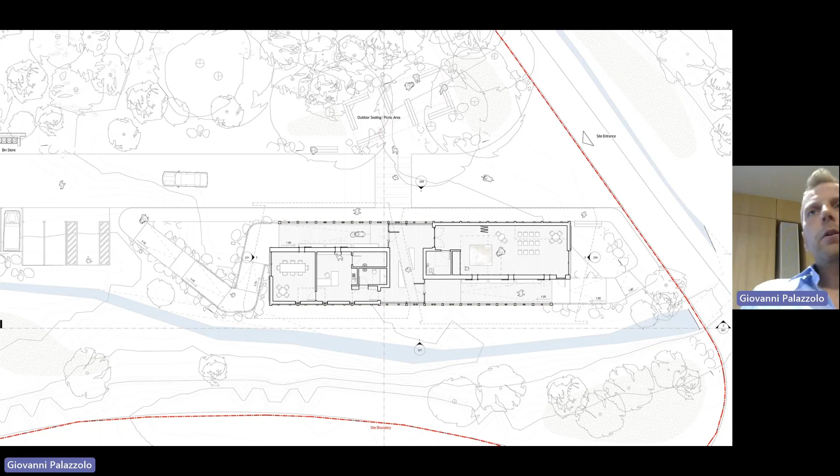This area is subject to really quite extraordinary spate in spring as the snow melts, so we're lifting this building off the ground. It also serves to make the building visible from the main road to Kinlochewe, which runs just off the bottom edge of this screen. Otherwise the building would be sitting in a dip. We lift it up, and it's visible to the public.

In order to do that, we've somewhat of a conceit. We've looked at the landforms around - this is Slioch, which is a remarkable looking mountain - and in particular noted these triangular features in the face of the mountain. I'm no geographer, but I think they're called spurs.

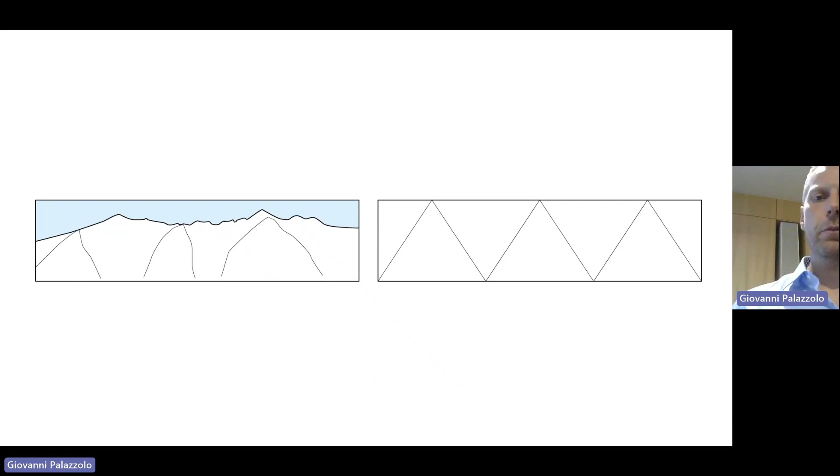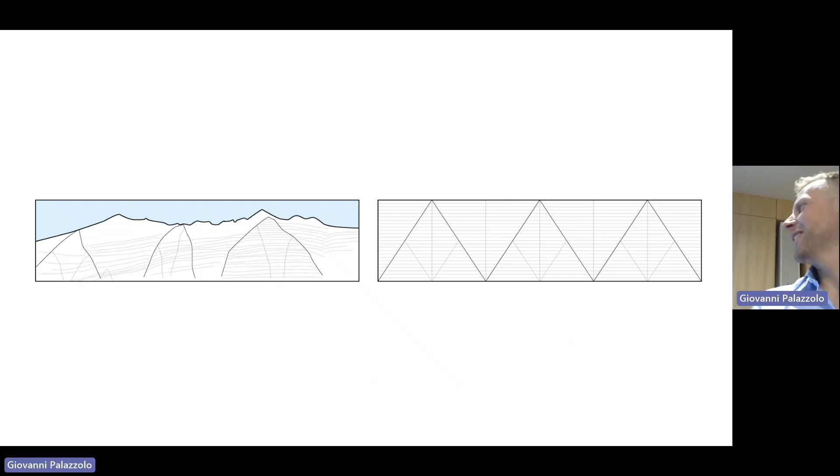Anyway, in lifting the building off the ground, we've looked at the building as a bridge, essentially. This building is a truss that spans from a very limited number of points of support in the ground, and we're looking at the form of the truss as something that has an echo in that landform. Does anyone know what type of truss this is? It's a Warren truss, apparently, but it's a rather good-looking truss, we think.

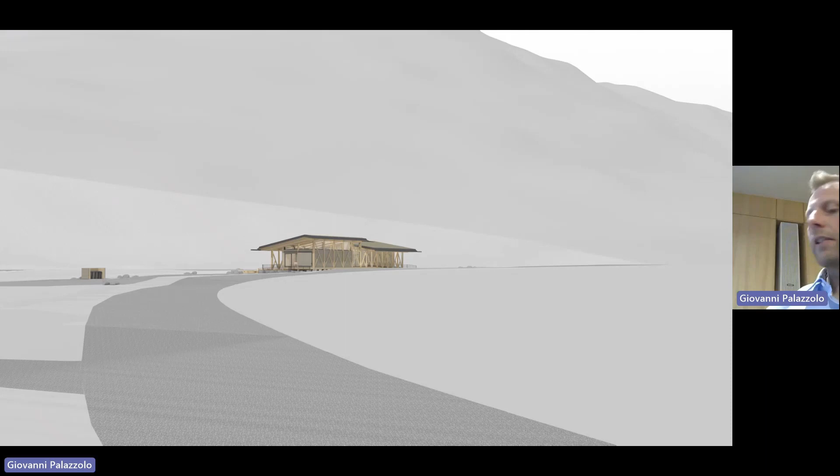The secret of using that timber is keeping its feet dry. We're already doing that by lifting the building off the ground, and keeping its head dry too - you can see the projecting eaves at the top. So it's an approach to detailing. There's a bit more to it than that, but it's about preservation of the material more than anything.

That's where all of the architectural expression and form of this structure comes from - the preservation of the material it's built from. People often turn their noses up at the use of spruce, for instance, but there are spruce buildings in Norway that have been standing for hundreds of years. It's all down to the detail.

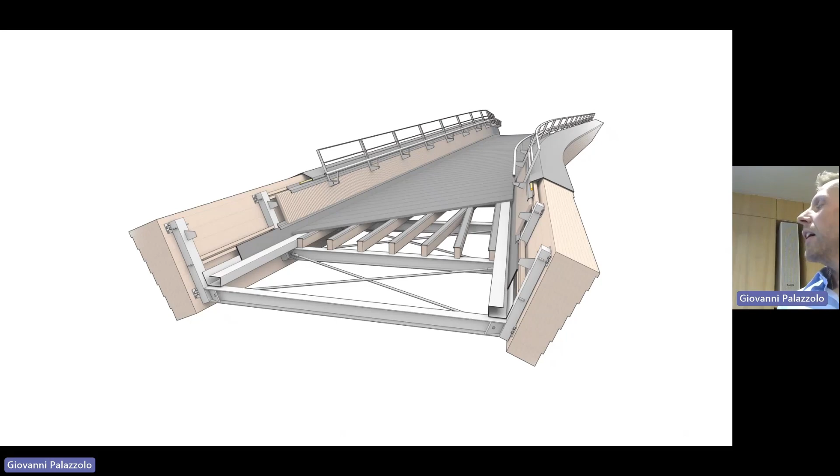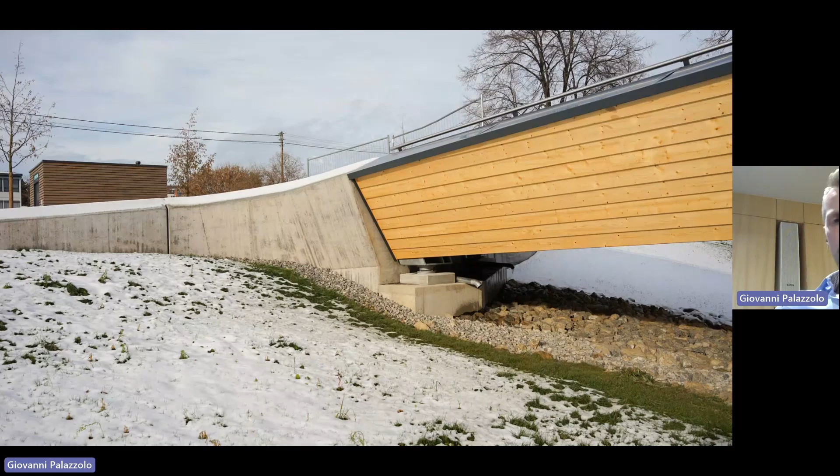The beauty of it comes from the manipulation of the design in order to protect that primary structural element from the elements, from the weather. You can see the waterproofing layer on top, and how the side walls of the structure are canted inwards to keep it out of the rain as much as possible. Then the deck itself provides weathering to the timber beneath it.

I'm pleased to say this has led on to another commission elsewhere in Germany. That's actually a competition we came second in, I think it was two years ago, but it's resurfaced as these things do. So we're going to be progressing one of these bridges to completion later this year.

Very nearly at the end now. So I've separated these three strands - economy of purpose, economy of reaction, and economy of material - as a way of discussing individual projects. Now, this is obviously a bit of a conceit really. You could apply these categories to any of the projects you've seen, in any order almost. I want to close on a project where these aspects are almost in balance, at least in my mind. I'm not closing on this project, I'm closing on the next one.

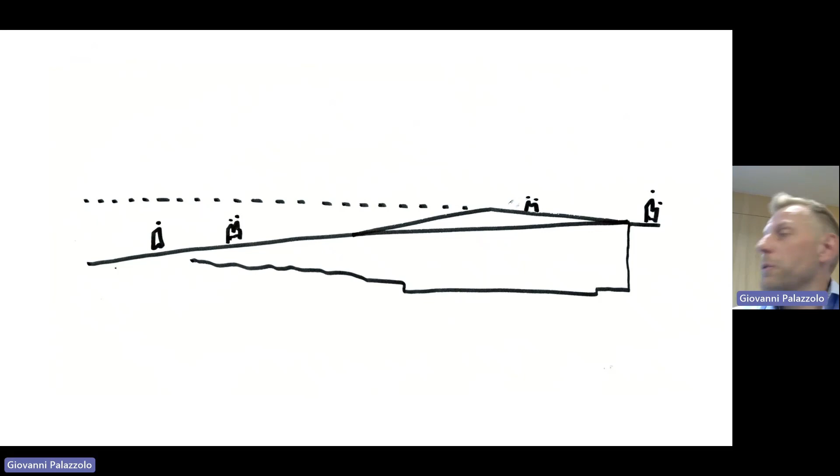There's a total length, including the ramp, but the actual bridge was just shy of 40 meters. So if the beam was working hard enough, the topmost point would be coincident with where we wanted the parapet to be.

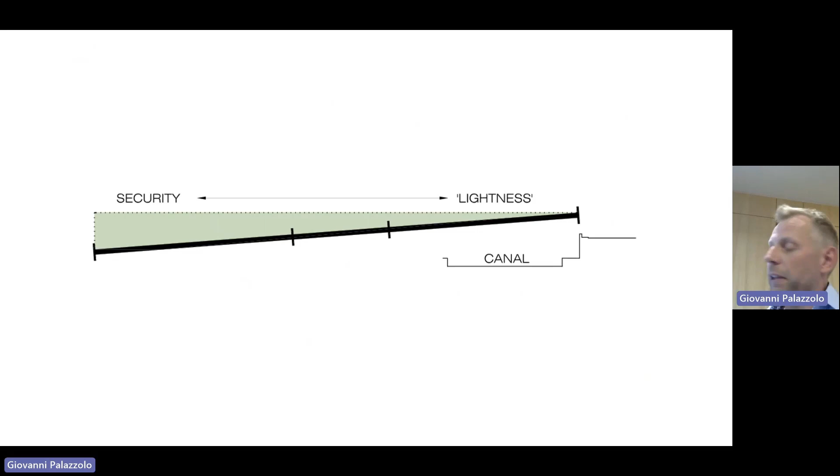And then there were various other considerations that were part of the brief to do with visibility over the canal, particularly for canal boats coming from the lock just to the north of the bridge, to be able to look down underneath the structure. Everything was pointing to a form where structure is above deck, precisely of the nature that Angus and I had discussed all those years before.

The bridge describes the bending moment. And we had a very supportive client - in fact, Argent seized upon the concept, which was one of several initially, before we did.

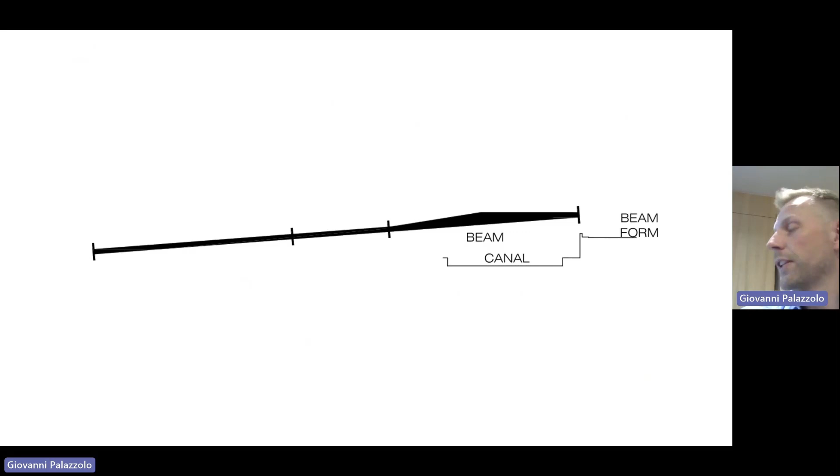They are oriented to the canal, so they don't obscure the view from the canal lock down into the lower basin. And it remains probably my favourite bridge of all the bridges that we've worked on and completed in the practice, not least because of the involvement of Angus and all his support over the years, but also the synthesis of all the economies that I've spoken about coming together in this one structure.

So to close, I'd say that we're all concerned with how to get to the other side, and hopefully through the discussion that I've just given you, and that we're hopefully about to have, I'd say it's not too grandiose to claim that bridge design shows one way of how it can be done. Thank you.